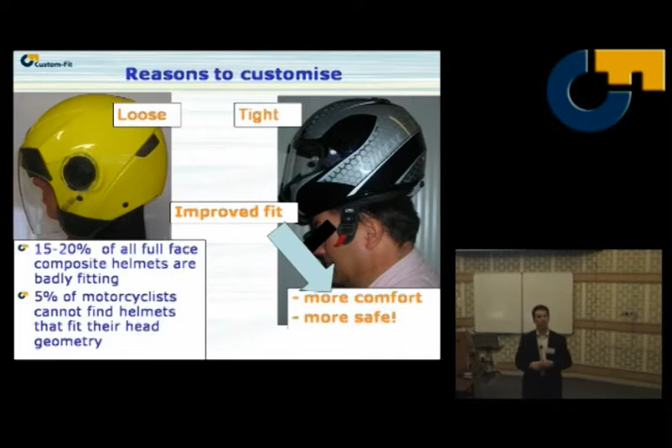If we start with the helmets, Jan Willem was kind enough earlier to explain why you want to customize a helmet so that it fits, so that it's comfortable, and so that it won't pull off when you get into an accident. We've already seen a demonstration of the nature of a helmet.

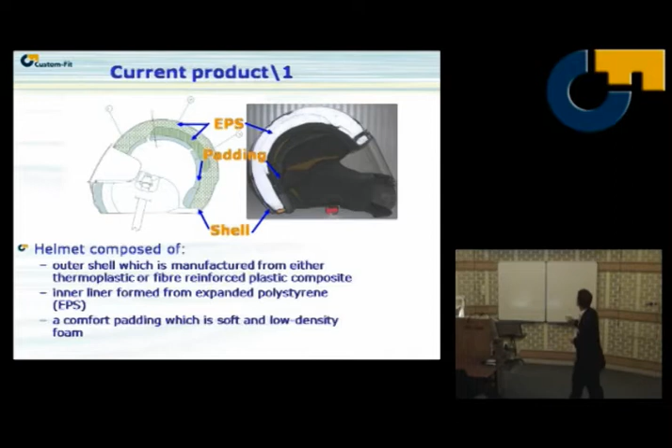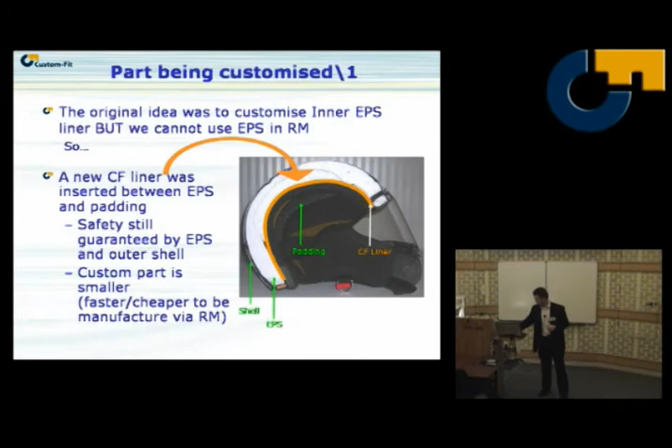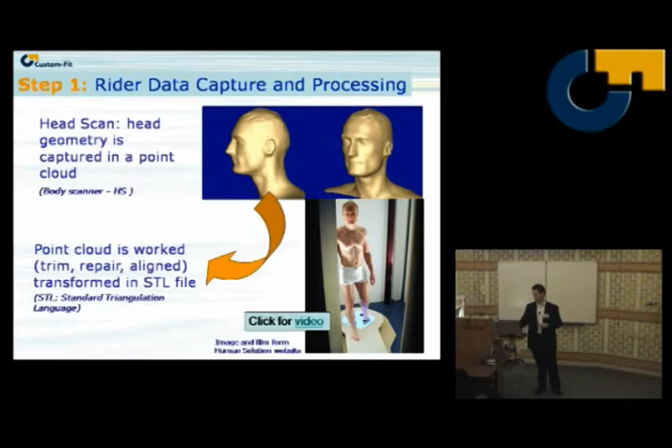You've just seen the scanning process with the Mini-Man. You saw the little laser light as it comes down. Same concept, that gives us head scans. Again, Jan Willem in detail went through the software process of how it works.

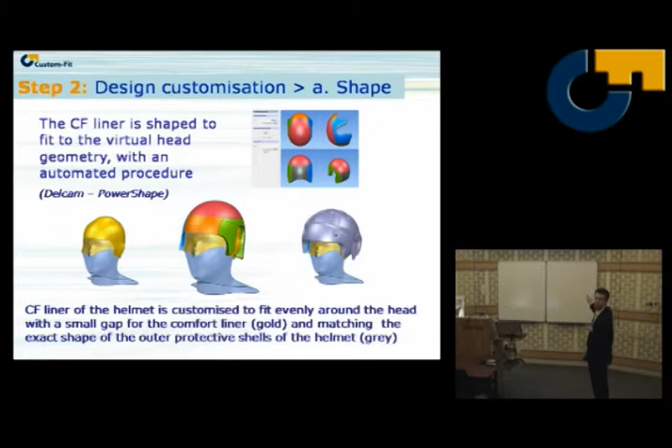They take it, manipulate it, and they come up with, as you can see down below, the inner cap for the head, 5 customized inserts that the actual hard shell of a helmet then goes on the outside of.

Once you have that shape, that liner, then you can start to play with it. We don't want it to be too heavy, so we can start to add all kinds of holes. This is our first generation customized helmet. These holes made it a lot lighter. It makes it a bit cooler.

Then we said, fine, what do we have the freedom to do with this rapid manufacturing process that you can't do otherwise? So we started to add, if you look at this side right here, hollow channels inside the helmet, a bit like conformal cooling for injection molding, conformal cooling for your helmet, so that as you're riding, air circulates all through your hair. So although you have a helmet on and you're safe, you still get that wild and free feeling that so many motorcyclists enjoy.

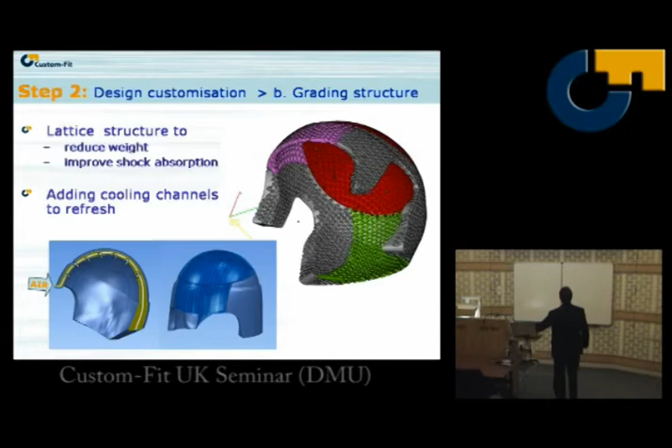Once the design is finished, before it goes to production, you need to be able to test it. Now, testing a motorcycle helmet, as we've already discussed, as you do these layer-based processes, the material properties are not the same in every direction, they're not isotropic. So as part of the Custom Fit project, we've developed specific FEA tools that allow us to virtually analyze how the part performs with anisotropic properties.

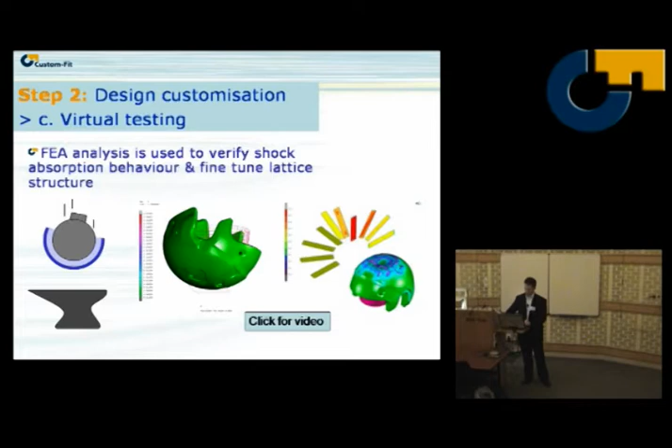To my knowledge, that is the first FEA analysis on multiple shells. You can see here there are multiple parts, how they are interacting, with a non-isotropic material. So we're fairly pleased with that. We're proud of that. I think that's been a nice innovation that the Custom Fit project has allowed us to come up with.

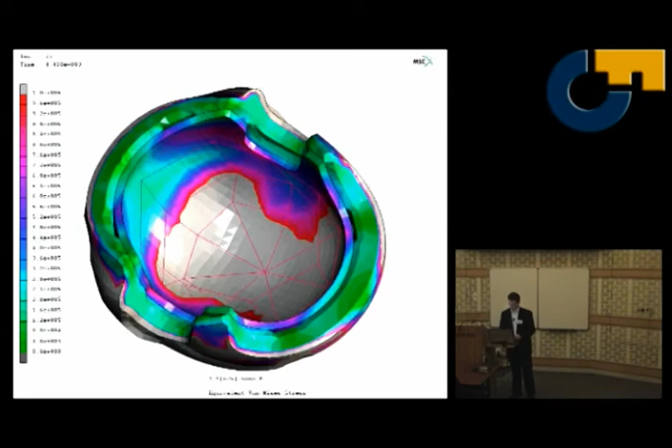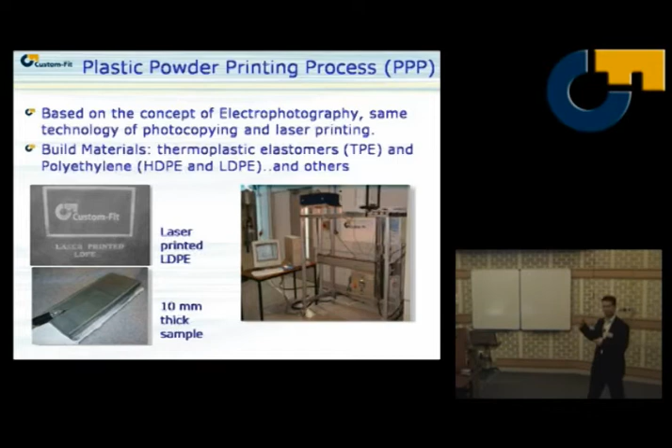Once we're happy with it, then it goes through one of these new printing processes. We've been using SLS while this is being developed. And we end up with an insert that looks like that.

I've pulled the soft liner out of this helmet. I'm holding in my hand a customized helmet. If you look inside, I'll pass this around in just a second. If you look inside it, see if that turns on. There we go, you can see.

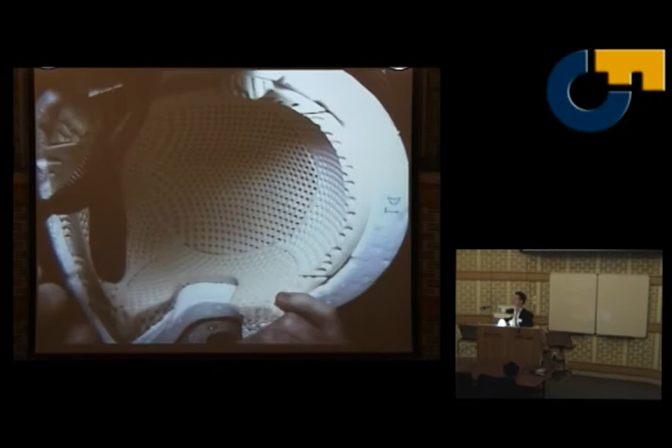You can see the different holes. You can see this is the customized liner. You can feel it, it's got places cut out for the ears. This is customized for one man. Only he can wear it. Part of the disadvantage of it is that only he can evaluate it as well. I'm going to start to pass this around.

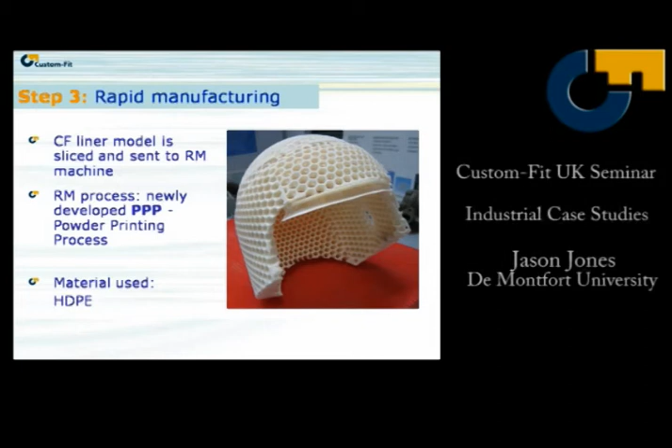That's quite a thick wall section there. We should emphasize that on other honeycombs, that one there is a little thinner. The wall section on that honeycomb is about 2.5 mil. We did go all the way down to 1 millimetre, just to try and get the weight down. Not the lightest of things at the moment.

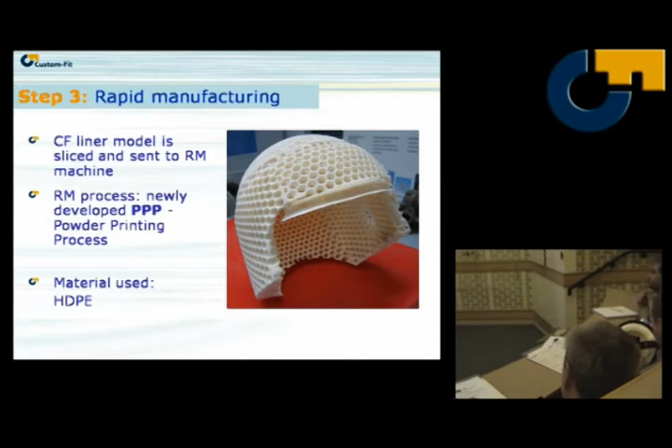What Dave's trying to emphasize is this is our first generation. The current generation, which I'll show you a picture of in a second, is still being tested, so I don't actually have it here in my hand because it's in Italy.

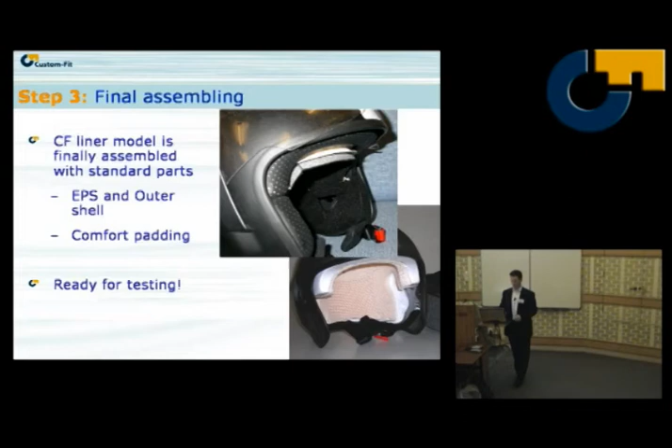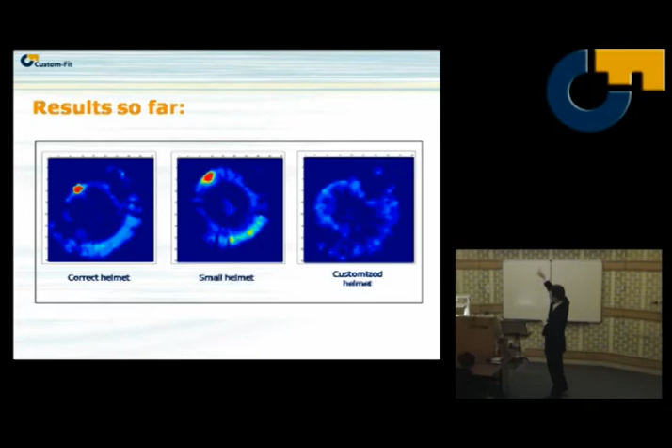Let me show you what the results look like on first generation. We took some pressure mapping equipment and put it inside the helmet. A standard helmet, according to the correct size you could buy off the shelf, gives a fairly high pressure area on this particular individual, particularly at the forehead. If you go down a size in helmet, just to emphasize what happens, you can see again you're getting pressure on the forehead, that bright red spot, and then all across the back.

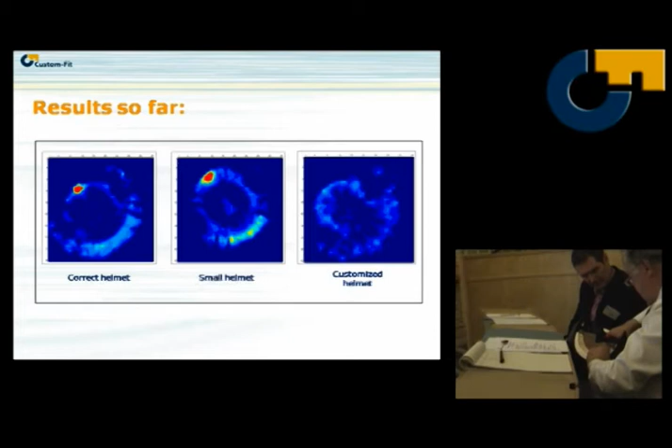We're very pleased to say that is our result on a helmet that's being passed around. You've got a much more even distribution of the pressure, giving greater comfort and allowing people really to have a much safer ride.

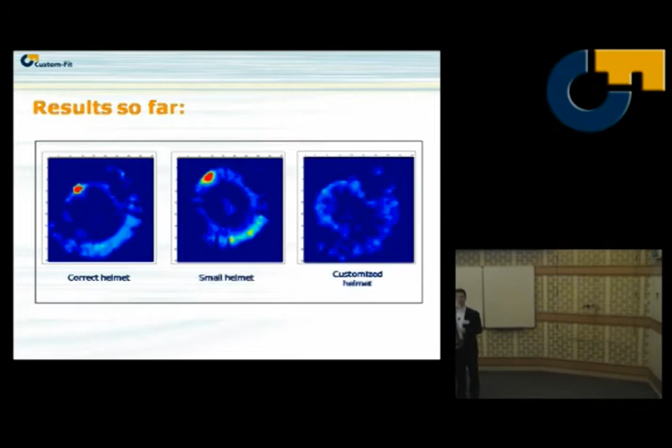There's still more to do. We are still customizing. We're working on the mesh that's being passed around - the hexagonal pattern on that one is kind of a normal spread. We're starting to manipulate the hexagons to give it a bit more graded functionality in its structure and performance. Again, we're taking away parts of that helmet that aren't necessarily doing very much, making it lighter, cheaper to produce, etc.

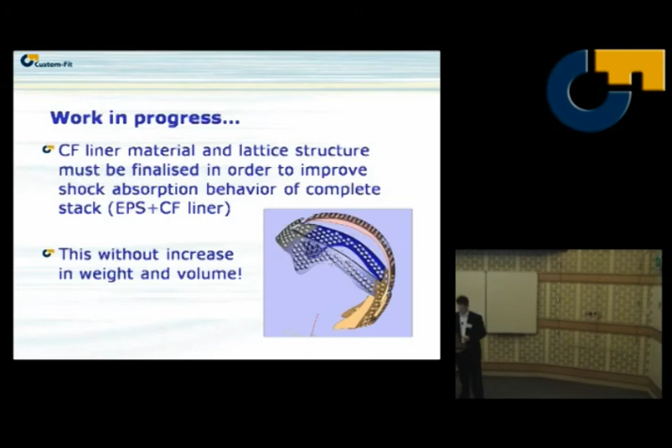I think it's very clear when you've got a surface like a head, which is relatively hard, and a helmet, you can scan those two items, put them together, no problem. What happens when you start to look at things that change shape, particularly during their dynamic use?

So if you go to things like seats, your posterior section deforms every time you sit down. The other part, the seat itself, also deforms. So how do you deal with that in a reverse engineering context? Any ideas? Dave actually gave us the answer a little earlier by using the pressure mapping equipment.

Ducati put a survey up on their website and said, how many of you experience discomfort on long rides? And we got back 92%. 81% of those surveyed said they would love a customized seat.

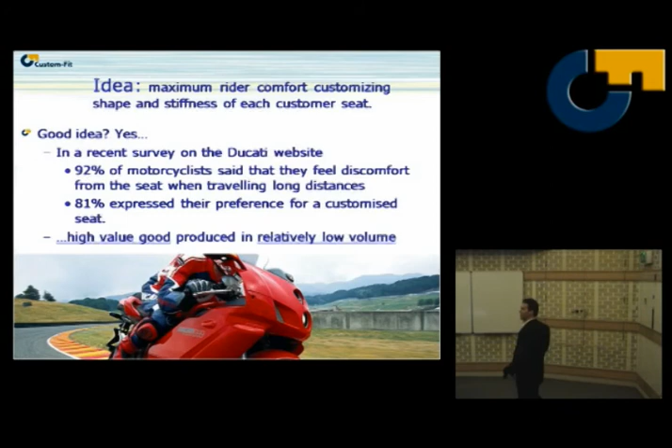The current seat consists of a rigid, hard bottom that's injection molded, and then they've got - forgive the crisscross - the grid on that, but it's a foam section that goes inside it, and then they've got a cover on it that they call the Sky, which is leather-like.

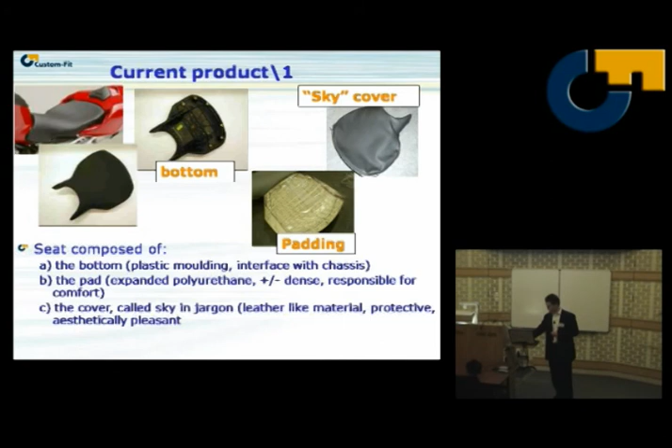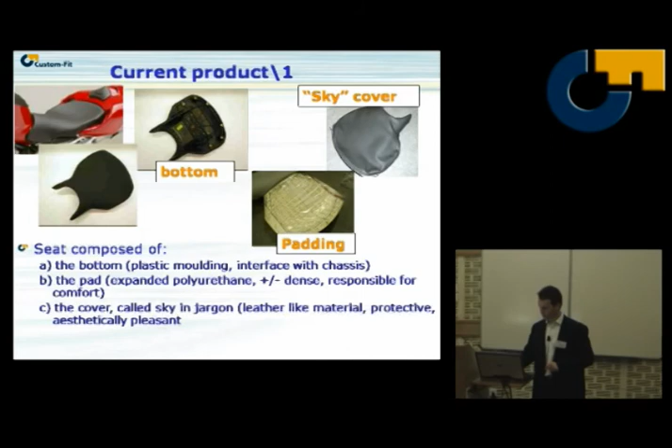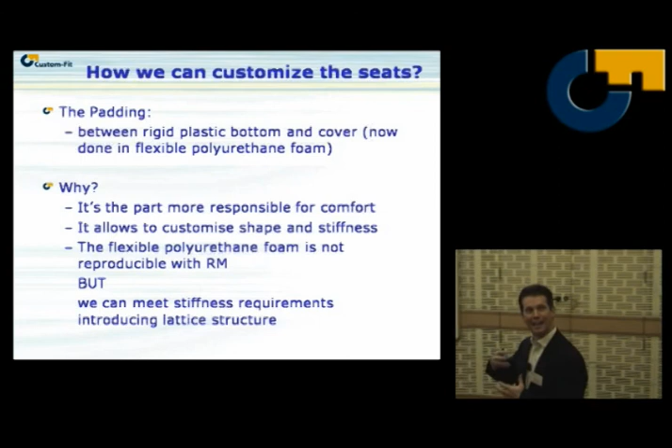What we're doing is eliminating this padding - actually, we're not eliminating it, we're replacing it with a rapid manufactured one. The only catch is polyurethanes are a little hard to rapid manufacture. So you've got to go with a slightly different material and create a structure inside it to mimic that soft feel as you ride.

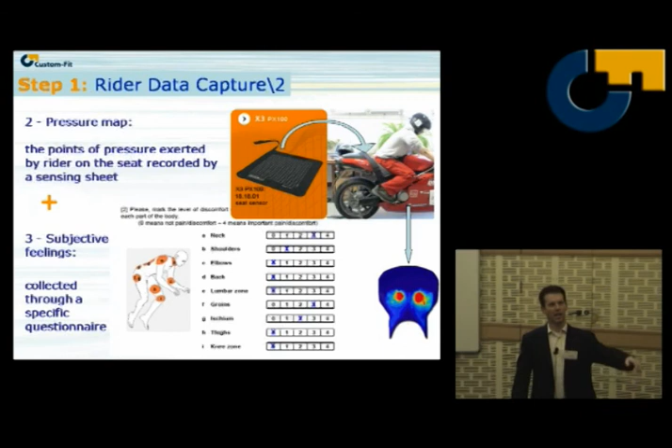Now, the third bit, subjective feelings. I'd like you to raise your hands in this room. How many of you like a hard pillow to sleep on? Okay, now put your hands down. How many of you like a relatively soft pillow to sleep on? Good. You know that you have a preference. You have some frame of reference for that.

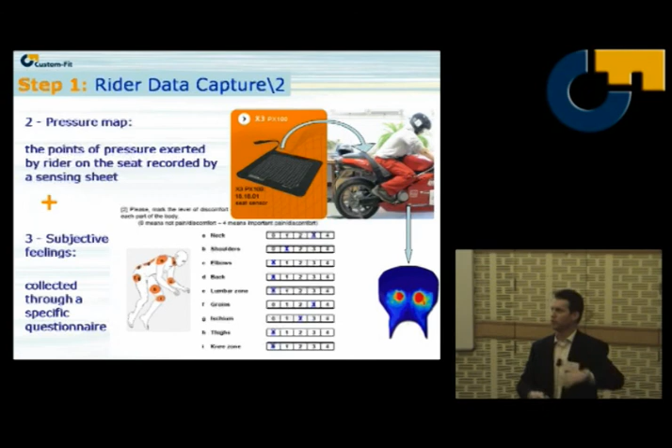IBV have worked out a fairly sophisticated system.